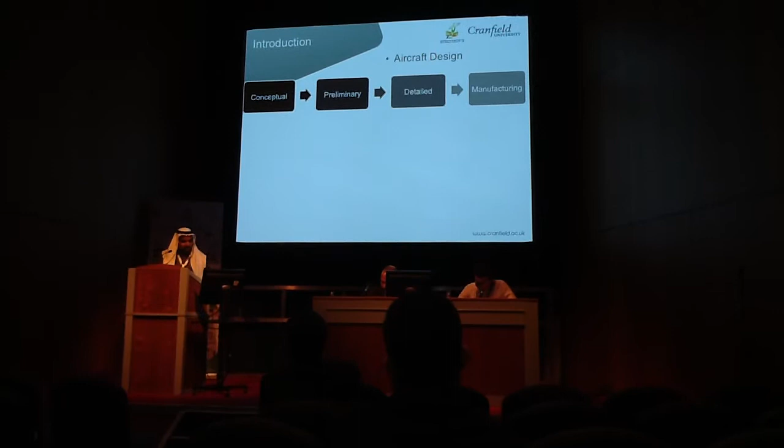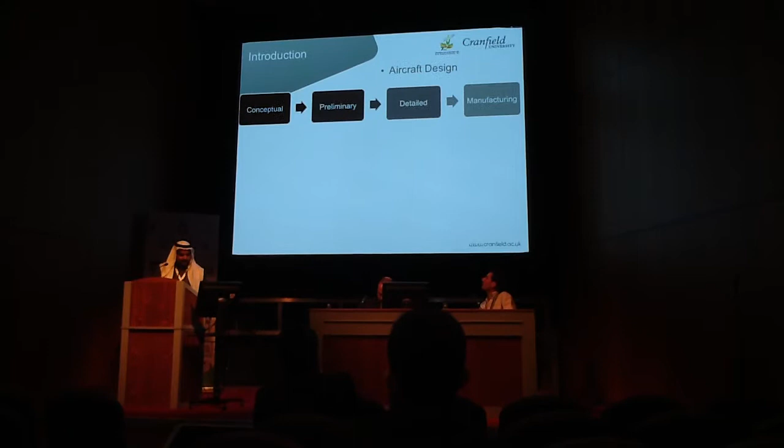If we want to talk about aircraft design, it is divided into 3 main sections. First is the conceptual design, second is the preliminary design, the third is detailed design. After detailed design is made, manufacture could be done.

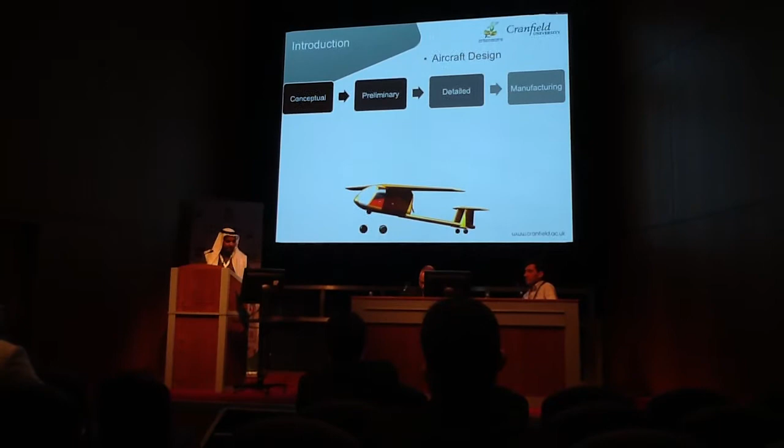Explaining that from my own experience, this project is a conceptual design. It gives the basic aerodynamics, configuration and geometrical data for the aircraft. After that, the preliminary and detailed design go more detailed in the aircraft design.

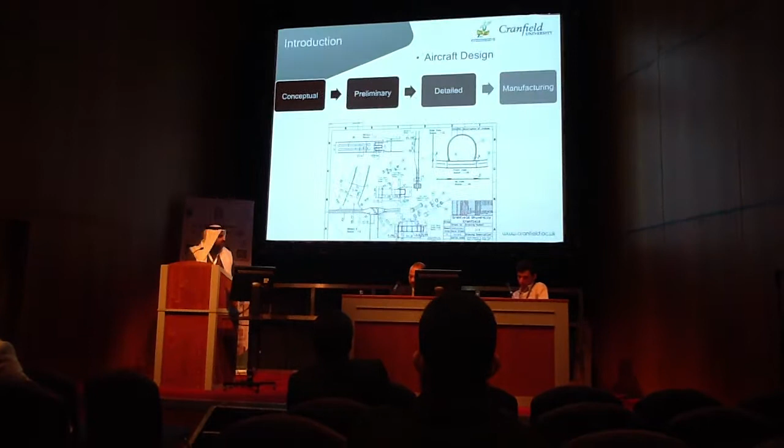In my pre-master, I did some preliminary and detailed design of the wing front spar to fuselage frame joint of the PC-12 aircraft. So you can see the level of detail reached in this project.

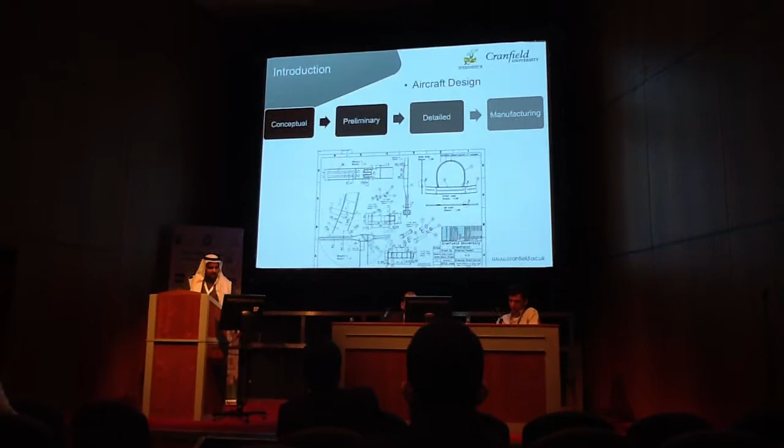One other experience in preliminary and detailed design is the group design project in Cranfield University. We were given a conceptual design by Professor Howard Smith, and the design was a space shuttle, the SL-12 space shuttle, and it was divided between 77 students from 21 countries.

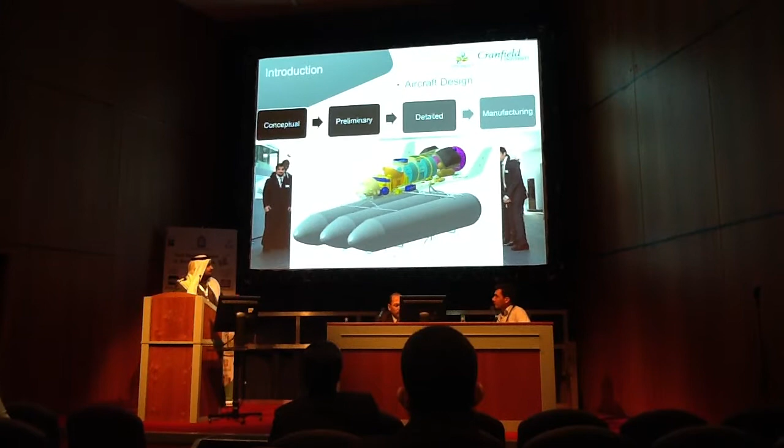Each student went to a high level of detailed design inside the aircraft. As we can see, this is the space shuttle, and my own part of the detailed design was the support structure for the expendable external tanks.

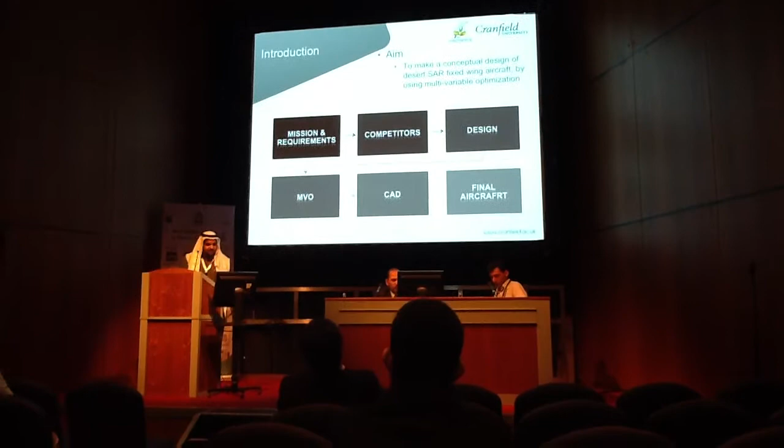Talking about my project, the aim is to make a conceptual design of a desert search and rescue fixed wing aircraft by using multivariable optimization. The project starts with mission and requirements. I put my own mission and requirements. Then a competitors' literature review was carried out. After that, the design synthesis was carried out.

Then multivariable optimization was done to change some parameters in the mission and requirements, and to change other parameters in the design itself. Finally, when the design was fixed, a small CAD model was made to represent the aircraft, and the final aircraft was represented.

For the mission and requirements in all commercial or fighter aircraft, regularly the mission comes from the customer, and the customer could be an aircraft company, could be passengers, and inside this project, I was the customer because I was lost in the desert and I need this aircraft to search and rescue me.

So, taking the design from this point of view, I collected some data from social networks and newspapers for people lost in the desert for whom there was search and rescue. As you can see, the blue signal is for the people who were found by ground patrol, and the air patrol searched for them, but they didn't find them.

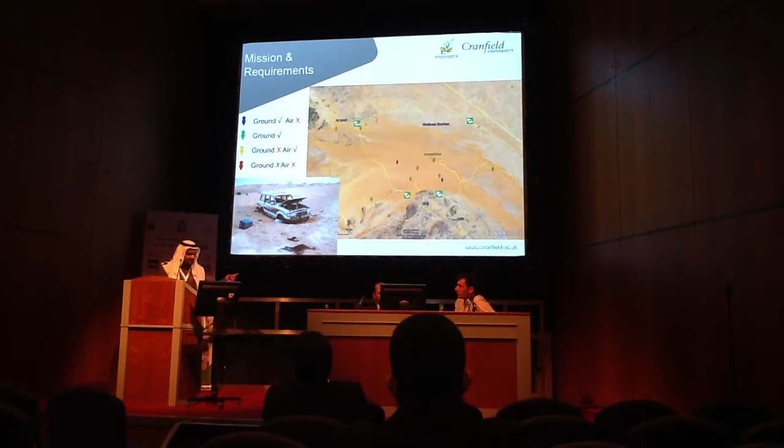And in this case, the person who was found last September, maybe 2 times the helicopter went above him, but they didn't recognize him. The green is those found by ground patrol, and the yellow is those found by air search and rescue, where the ground didn't find them.

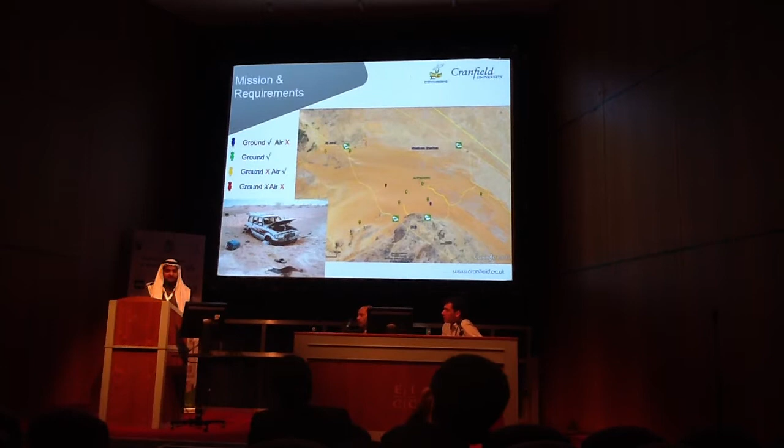The red one was a very sad moment. In 2006, it's the Al-Atiq family, God bless them, and by air patrol and by ground patrol, they searched for them for 2 months. They didn't find them. They found them only by chance.

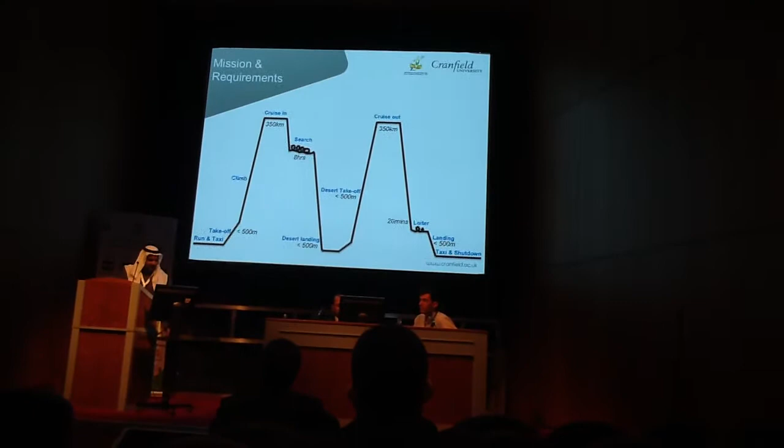So, observing these locations and observing the airports where my aircraft could take off and land, I could make a mission for my aircraft. So this is the mission for my aircraft. I wanted it to take off and land in less than 500 meters to achieve short takeoff and landing capabilities.

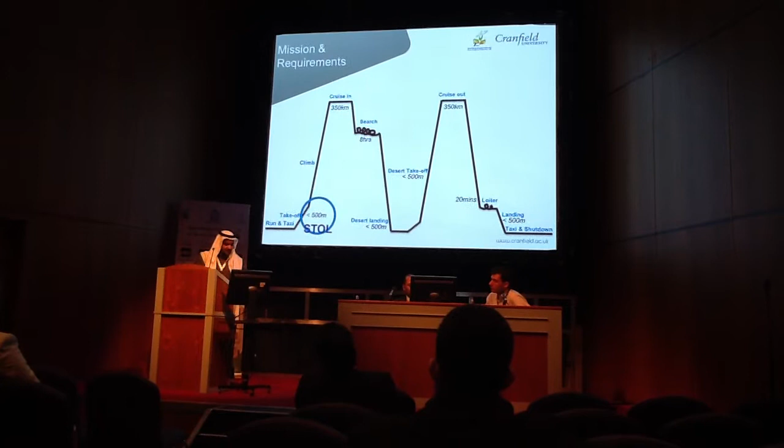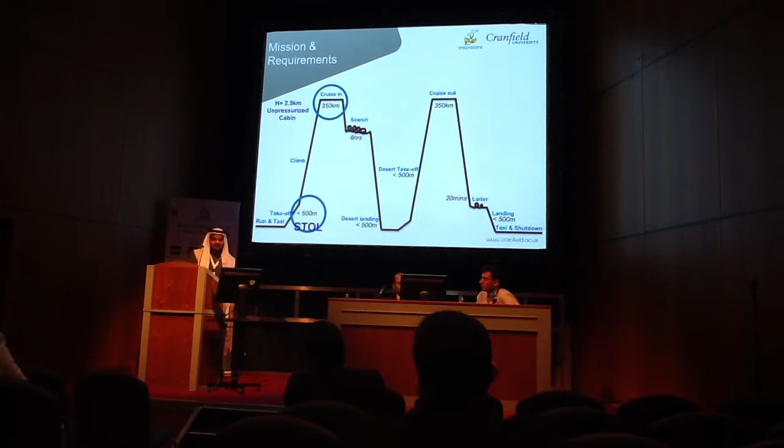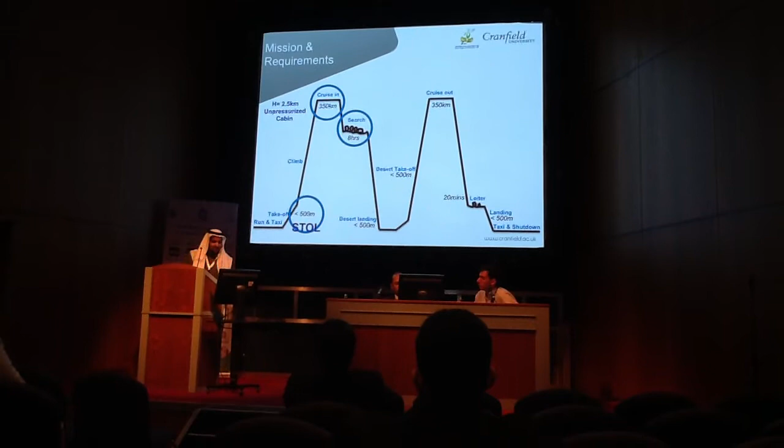I wanted it to cruise 350 kilometers to reach the areas of people lost, at a height of 2.5 kilometers, to design the aircraft to be unpressurized and avoid the complexity of pressurizing the cabin. And the search I made to be 8 hours to avoid the fatigue of the crew.

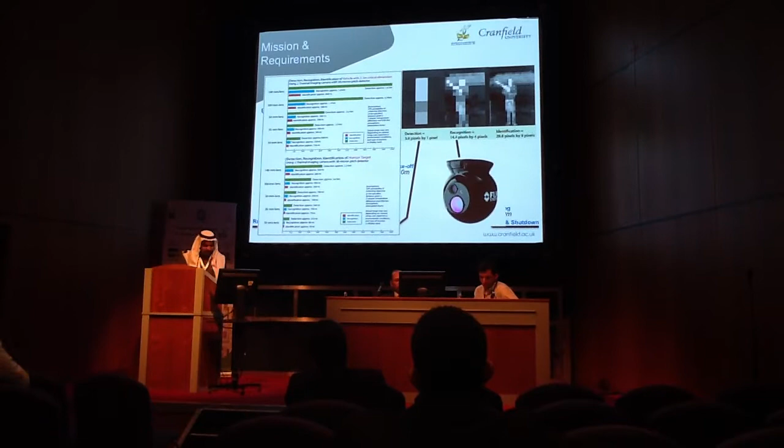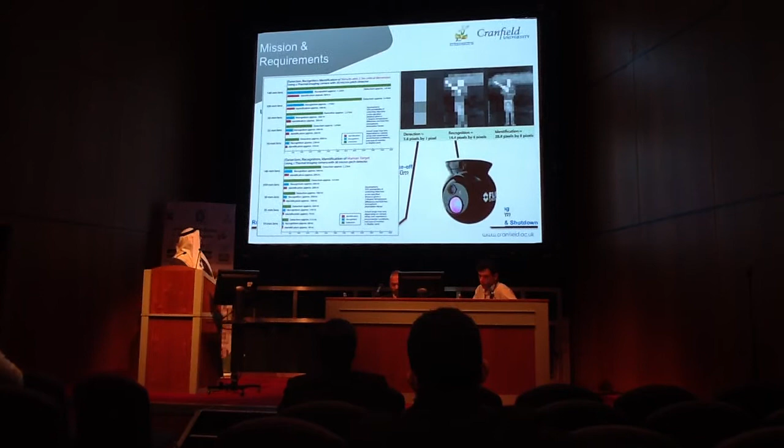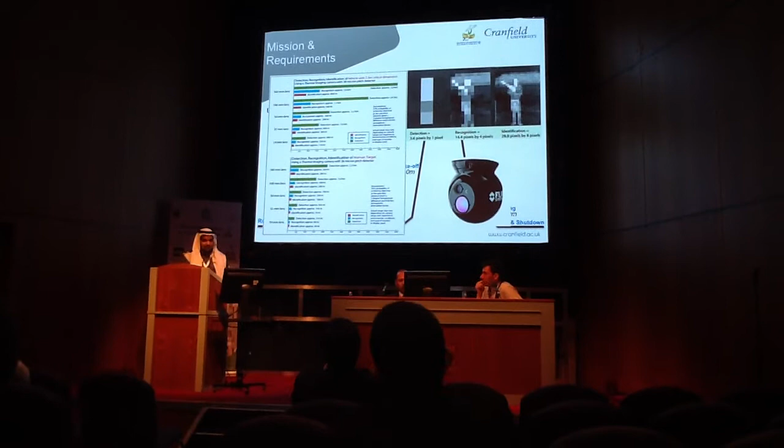Also, the second thing is the forward-looking infrared camera. Here you can see the detection, recognition and identification capabilities of that camera. I found one camera which could operate between 35 millimeters up to 135. So I found from this graph that if the aircraft flies at 1 kilometer elevation and searches, the person could be identified easily.

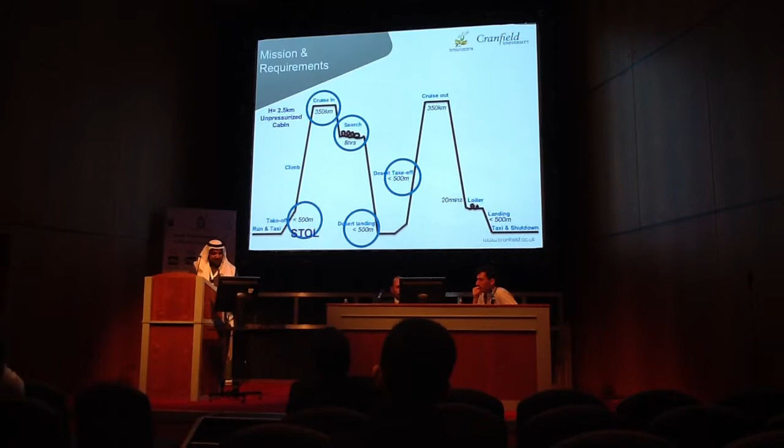Desert takeoff and landing, less than 500 meters. I did a fast investigation on the desert. I found a lot of places where the aircraft can land in less than 500 meters.

Now, if we talk about the competitors, they are not just the same kind of aircraft, fixed-wing manned aircraft. It could be satellite, it could be helicopters, it could be UAV, and the main competitor is the UAV, or unmanned air vehicle, because it's very cheap and could fly to long endurance. But to make my aircraft more special, I added that the aircraft could land and take off from desert capabilities.

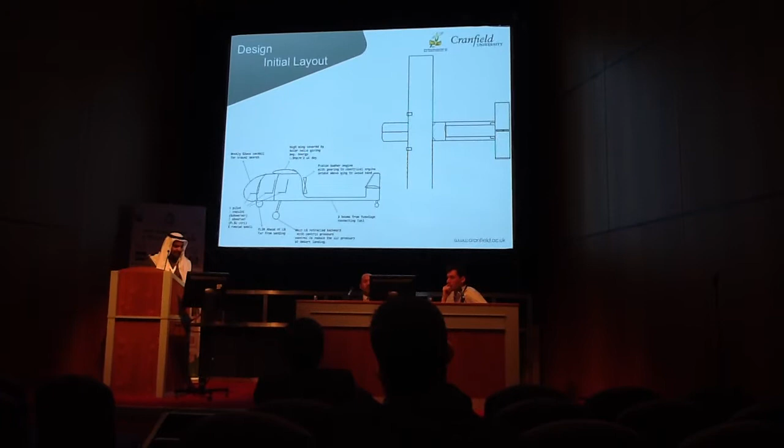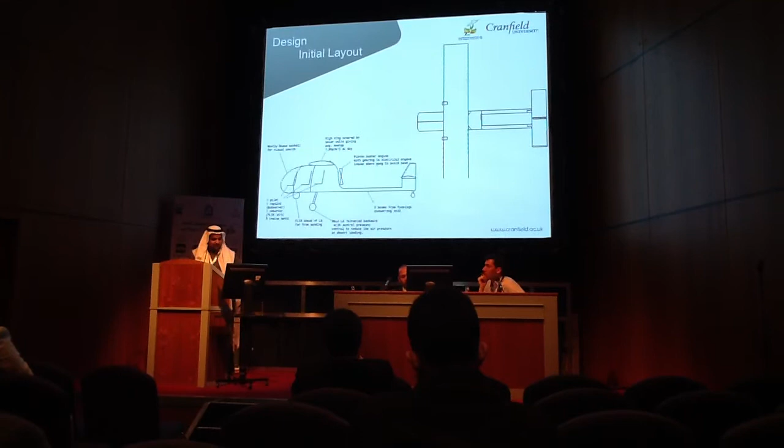So I made my initial layout. I put the aircraft to be 4 landing gear aircraft, pusher engine, glass cockpit. I discussed that the aircraft can be covered by solar cells because of the high solar energy in the desert regions in Saudi Arabia. I decided to put forward-looking infrared. I decided to put 6 passengers, 3 crew and 3 passengers.

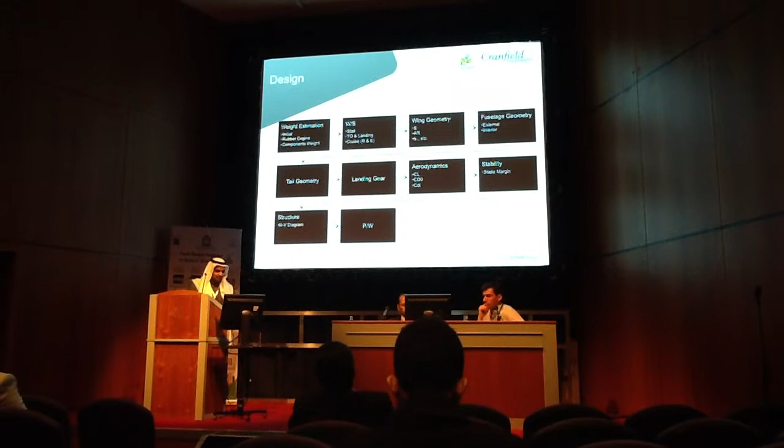So the design sizing was carried out. The first thing is the weight estimation. The initial weight estimation is done by some equations relating to the previous aircraft. Second thing is the wing loading, W over S. S is the wing area. So the wing loading has some equations for stall case, takeoff case, landing case, cruise and range and endurance. After that, I divide the weight estimation by the wing loading, so I find the wing area.

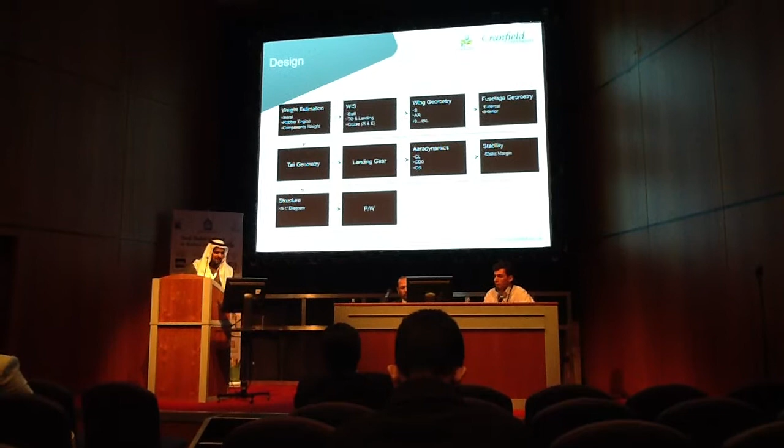After that, I can find the wing geometry, the wing area, the aspect ratio, the wing span. Then the fuselage geometry is found. The fuselage is the body of the aircraft, the external layout and geometry, and the interior also. Then the tail geometry, the landing gear. After that, with knowing all of the geometry of the aircraft, the lift coefficients can be found, the drag coefficient, the parasite drag, and then lift-induced drag.

Then the stability could be made, and the structure of the aircraft represented by the load factor over velocity diagram. The final thing is the power loading, which is the horsepower, because the drag is pulling the aircraft back, and the thrust is reflecting that force. So the power loading is divided by the weight. And after knowing all of this, I did the multivariable optimization, which is iterating the weight again to the initial weight estimation.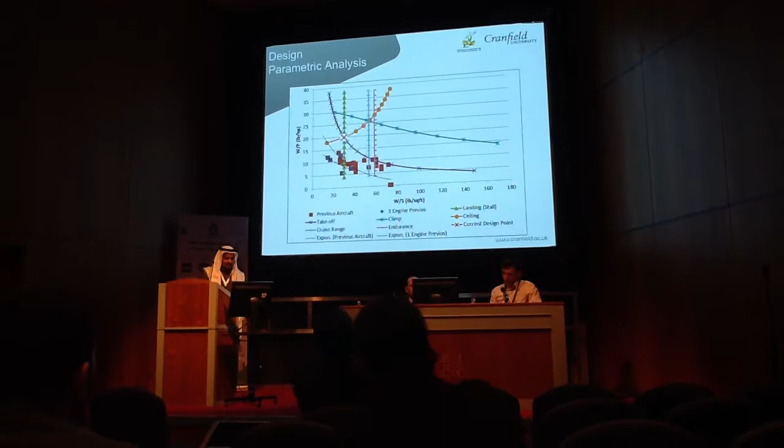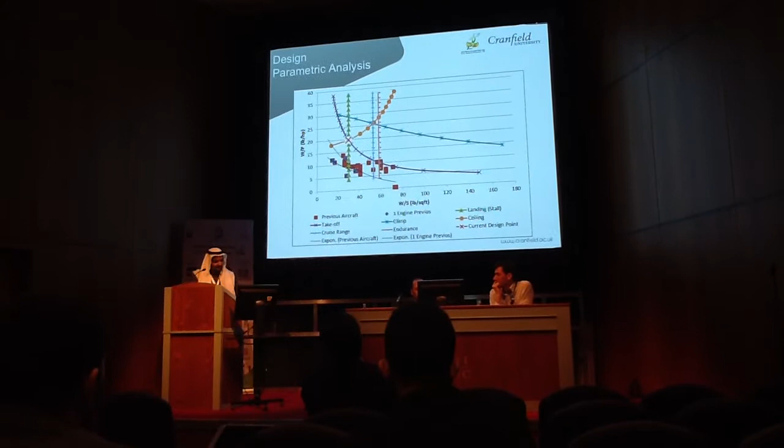So these are some equations which I used. This is, for example, the component weight. Each aircraft component has its weight and location. This is the wing loading. This is the parametric analysis. The objective is to make the power loading as high as possible, to decrease the power of the aircraft, and to make the wing loading as high as possible to decrease the wing area of the aircraft.

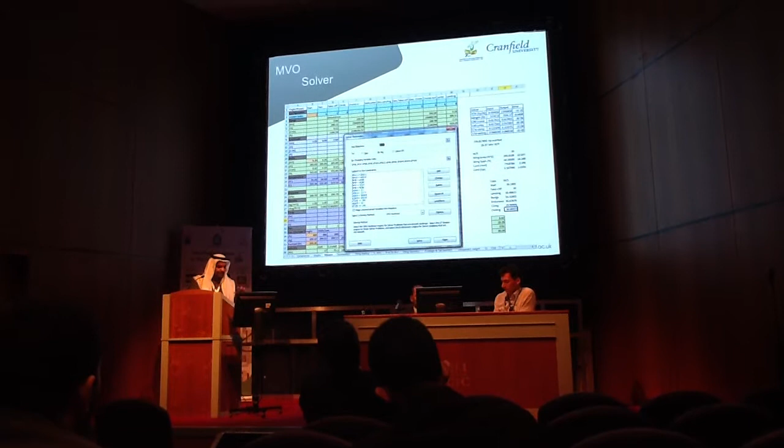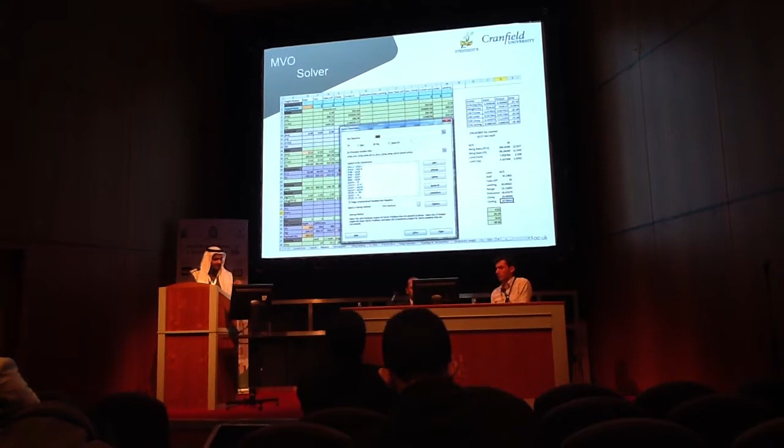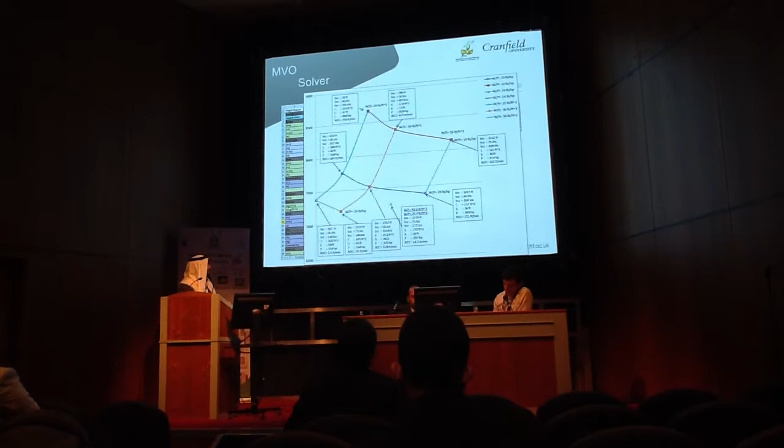So after that, I used Excel solver to put some constraints depending on my mission and to search for the minimum weight of the aircraft. Inside the Excel solver, each time I change the wing loading and power loading point and generate a point of the design. Then I found this parametric plot. As you can see, the left axis is the aircraft weight. If I want the aircraft to be very low weight, for example, the takeoff distance will be 3,000 feet, which will be a lot.

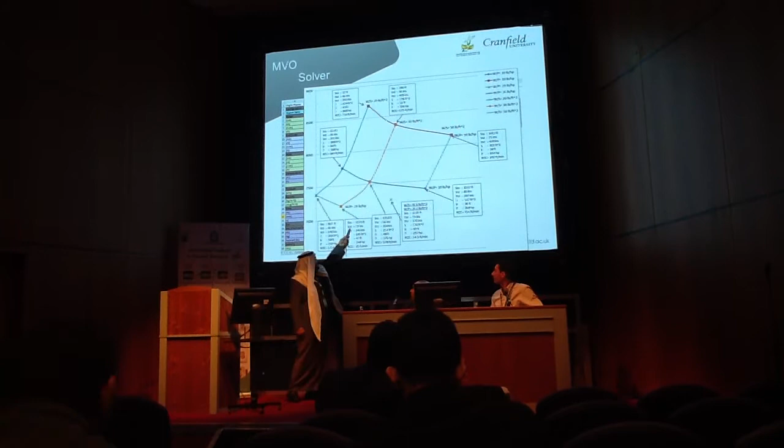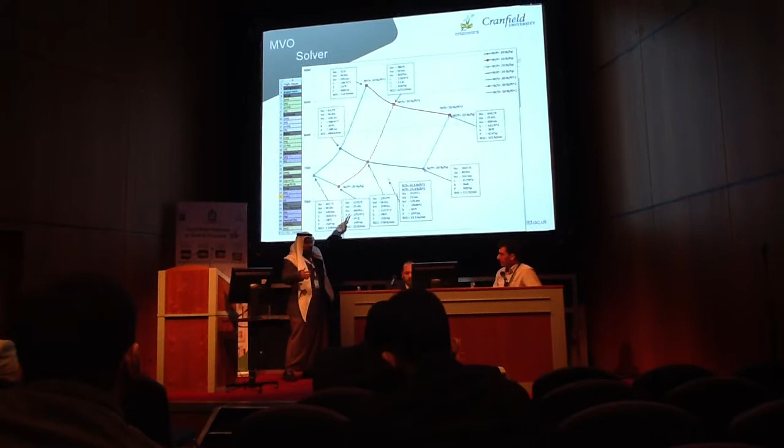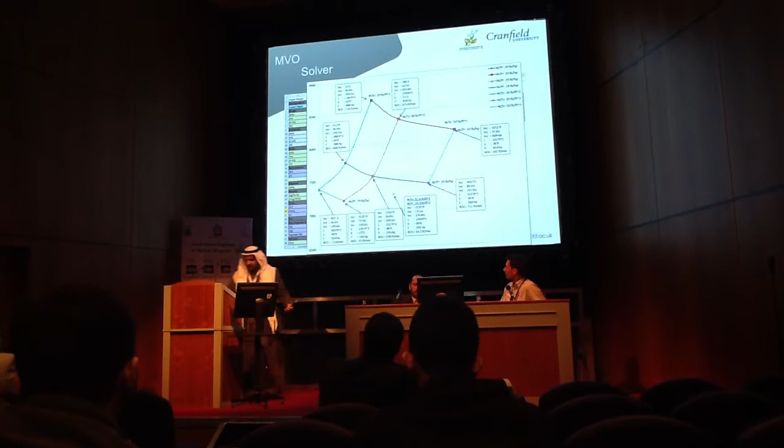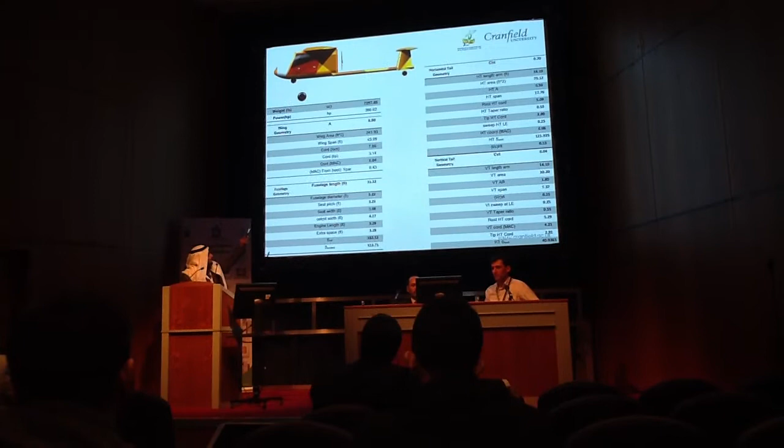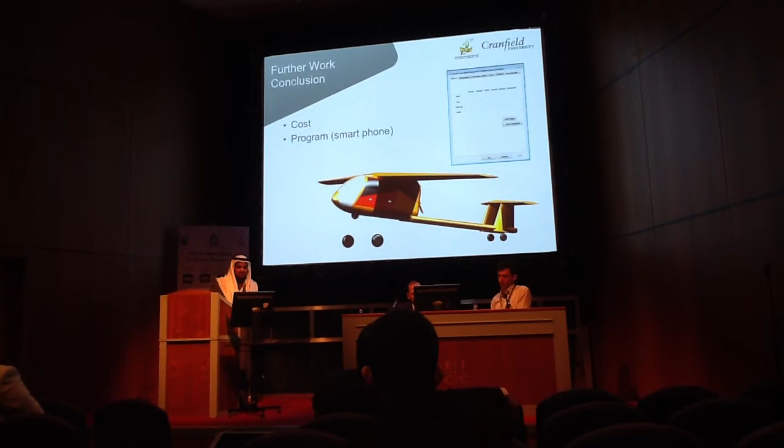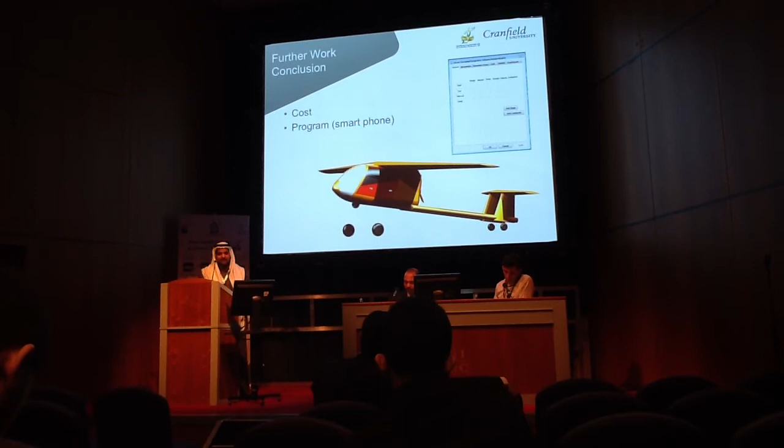This is the weight components of the aircraft, the performance of that aircraft, the stability. Finally, the CAD model was made. Very fast CAD model, because the configuration was changing at each point of my design. Further work which I might carry out on this paper is to discuss the cost of that aircraft. I didn't discuss the cost. And cost could itself be a parameter in multivariable optimization. And also I'm thinking of making a small interface of my Excel sheet, to make it like a good interface for an aircraft design program.